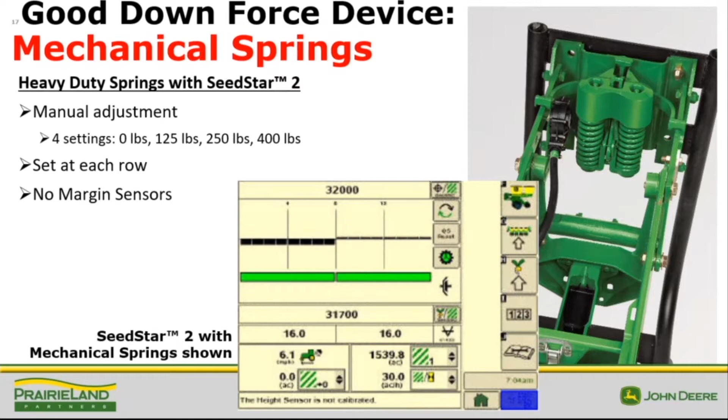How do we get downforce? Well, we have several different devices. We have a good downforce system that we call mechanical springs, shown here. These are heavy-duty springs. I can set them to 0, 125, 250, and 400 pounds for each row. And these are very reliable systems, and they are set once per field usually, and off we go planting. So that's a good downforce system.

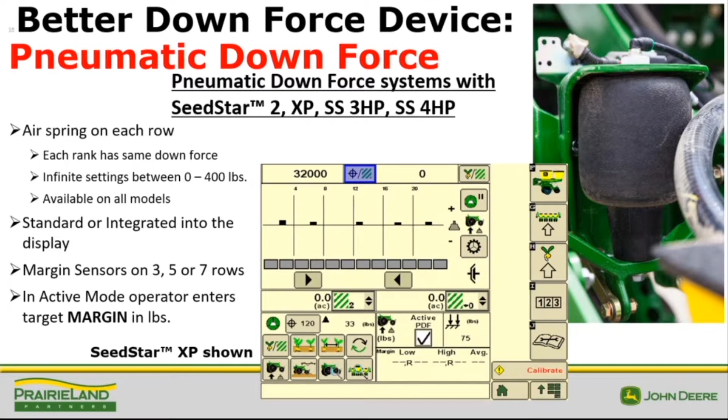Now, the best downforce system is called the individual row hydraulic downforce system. It is best because hydraulic is really good. It's faster. You get another 50 pounds of weight transfer. But it's the best because each row has their own amount of downforce.

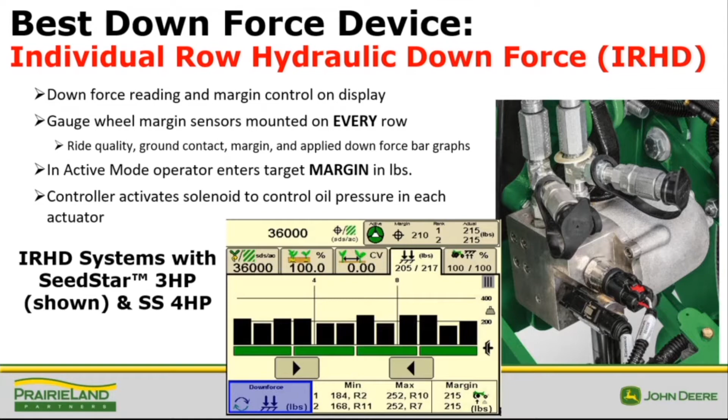So what you can see on the screen in the center is that we have a target margin of 210, but each row has a unique amount of downforce to attain that 210 margin, and that's for each row. So if I had the margin screen up here, they would all say 215, but you can see on the screen that each row has unique downforce. This, of course, is associated with SeedStar 3 and SeedStar 4 equipped planters.

So now let's talk about these downforce electric systems. And I call them systems because that applies to the SeedStar style in the cab as well as the mechanical system outside the cab. So let's start first with our standard pneumatic system. Now, this compressor in the center of your screen there is associated with SeedStar 2 or ComputerTrak 350 equipped planters. This is a nice system in that the little toggle in the center of the screen there lets you adjust the PSI in the air bladder, air spring there, and you can adjust it to your preference across the whole planter, one place to stop.

Now, the gauge here on the lower left-hand side of your screen measures both in pounds per square inch, and it has a correlated scale to show you the amount of weight transfer. So it'll tell you that airbag has X number of pounds in it, but it is transferring a certain number of pounds from the toolbar to the row unit.

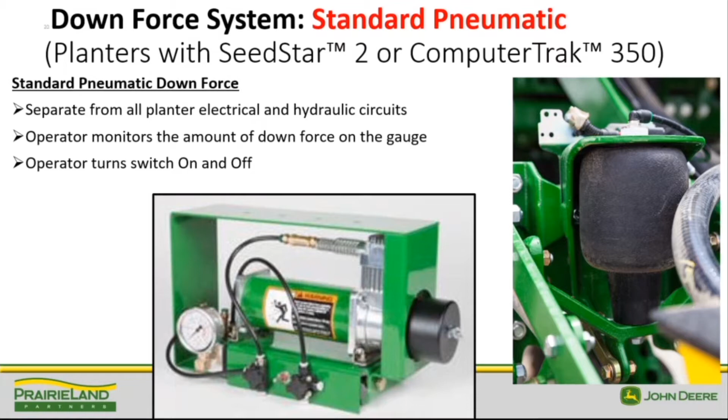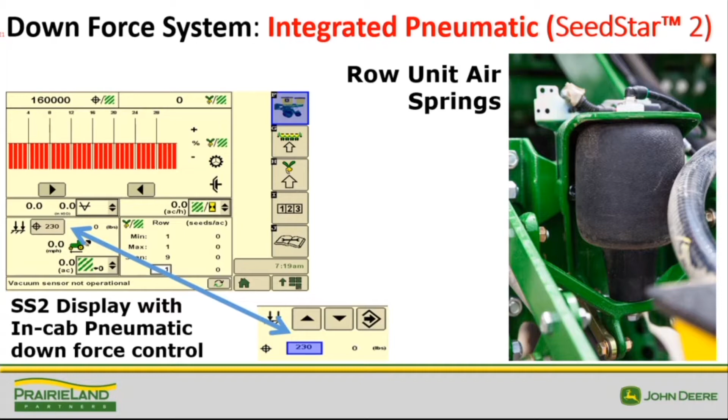Nice gauge, nice indicator. The next level up downforce system is called Integrated Pneumatic Downforce System. It too is associated with SeedStar 2, but it's different in that I can adjust this from the cab with the downforce target there of 230. So that 230 pounds of downforce target then is the amount of weight transfer, not the amount of pounds per square inch in that airbag there.

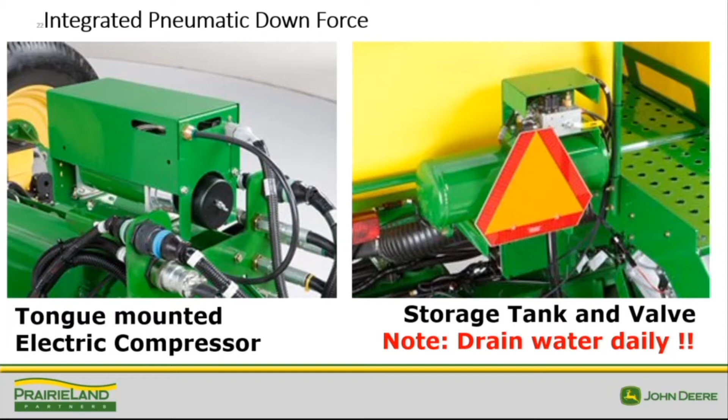Now, on the back of the planter is going to be a 5 or 10 gallon air tank shown on the right hand picture and a valve body with electric solenoids on top. Now, the compressor on the tongue of the planter shown on the left hand screen is larger than the one we showed you in the base system, but all that electric compressor's job is to put air in the tank. The valve puts air in the bag. And so that is what is done by the operator from the buttons in the cab.

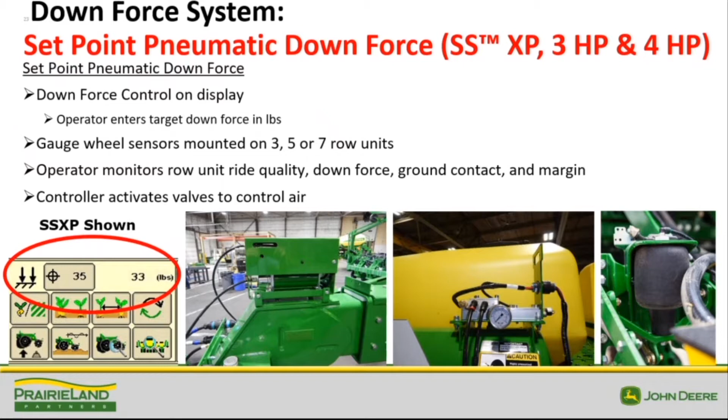So now let's talk about our set point pneumatic downforce system. This is associated with SeedStar XP, SeedStar 3, SeedStar 4. The difference between the integrated and the set point is that we have margin sensors. And those margin sensors are called gauge wheel load sensors on 3 or 5 or 7 row units on the individual planter. So now what happens is I'm able to get a feedback of how much margin I have if I have a set point system.

Now, the top of the line is the active pneumatic downforce system. What we're able to do is set our target margin, and what that does is the computer, not shown, will set our downforce to achieve that margin.

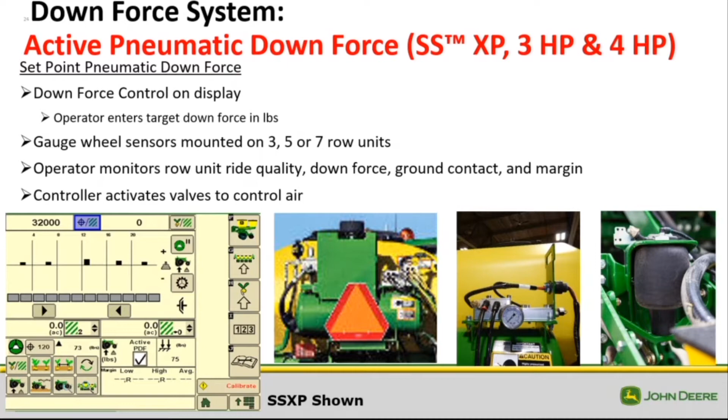So what we have to have is an air compressor on the back of the planter that is two times bigger than the one we had on the previous unit. And what that does is it gives us more volume in that twice as big tank also, so that when the computer is adjusting the downforce much more frequently than us humans do, we have the air capacity to do that. So this is a nice system, and you set it and you keep driving.

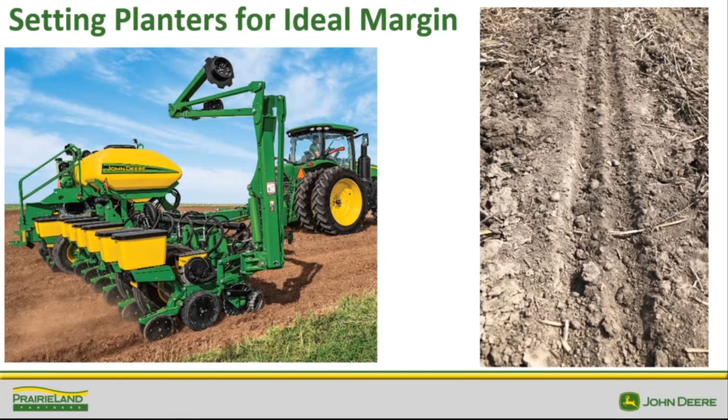Speaking of setting things, let's talk about how to set planters for ideal margin. So what we're going to be doing is trying to attain that ideal closed seed trench you see there on the right that we took early in the 2020 planting season. What we now need to understand is that if we're going to use set point, the operator is in charge of adjusting our target downforce.

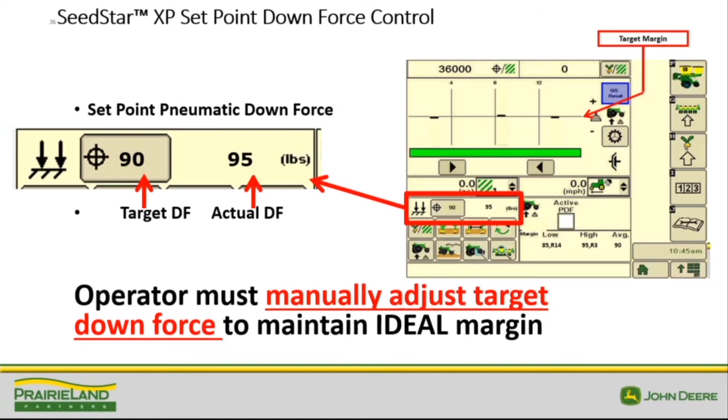So you can see the target sign there, and we're going to have a target of 90, and the actual downforce is going to be, now this is weight transfer, not PSI again. The operator needs to adjust that margin or the downforce target to make sure our margin target is being maintained. And that's what we're going to try to teach you now, is how to set your planter if you're using set point. Now, the operator's manual tells us to put a number in the downforce target of 75 pounds.

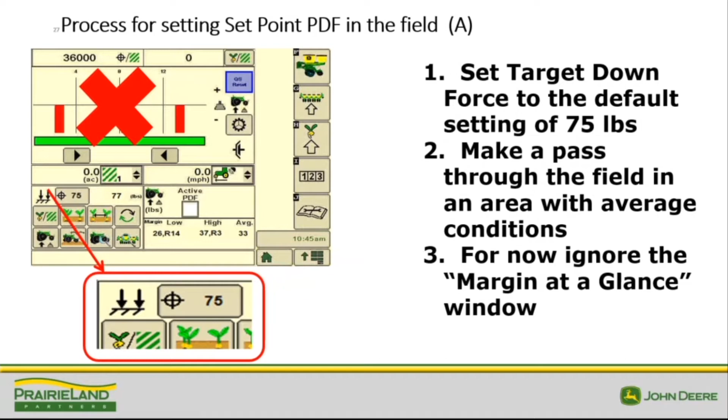All right, you've got to start someplace, and that's a good place to begin. So with 75 pounds in my target downforce, we're going to make a pass through the field in normal conditions. Now, for now, we're just going to ignore the margin at a glance window because we haven't set that yet. So where do we look for that ideal seed trench?

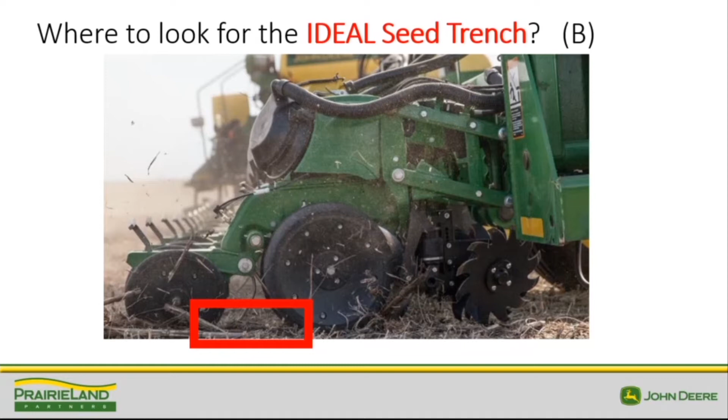Well, I put a red rectangle around where the ideal seed trench lives, and you need to be inspecting. It lives ahead of the closing wheels and behind the double disc openers, and so that is where you need to be looking for that ideal seed trench. So the pictures I've been showing you are with the gauge wheels raised, so we could get a better picture of that. But that's where you need to be looking for that ideal seed trench.

Now, as you make a pass through the field, get out and inspect that seed trench. You may have to add to the number. You notice we went from 75 up to an average of 90 pounds margin. What we need to do is just adjust our downforce until we get that ideal seed trench. Now we need to set our ideal margin.

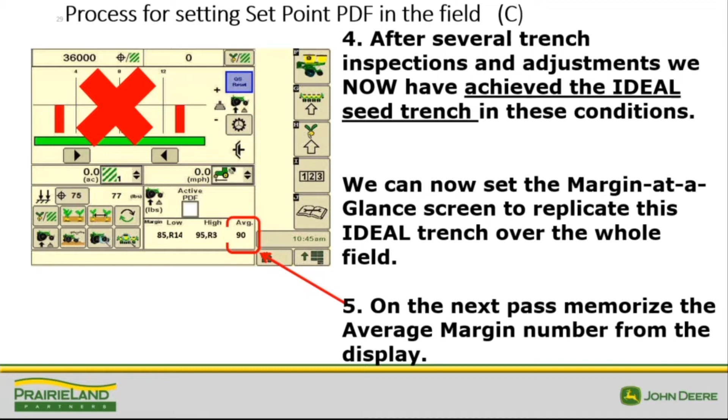And so how we do that is when we have that ideal seed trench attained with our perfect downforce, the next pass through, we look at the average margin number here shown in the red square on the right. So in this particular case, it was 90 pounds of average margin. Now, we need to enter that into our target margin screen. Well, how do we get there?

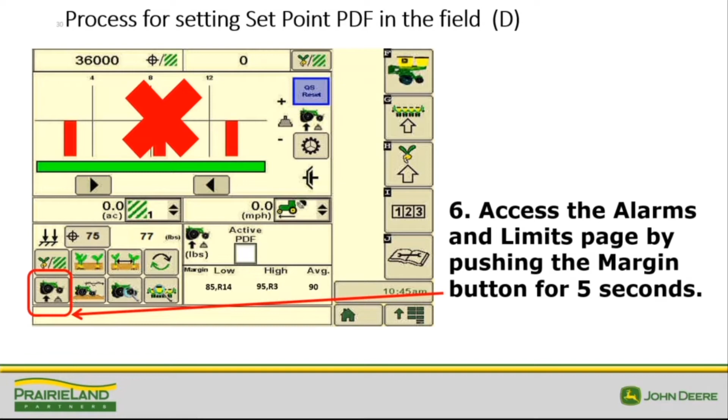Well, for 5 seconds, we hold the margin icon in the lower left-hand corner of the screen. And when we do that, after about 5 seconds, the alarms and limits setup page appears. So now in the empty target margin window there, we need to enter that average margin into our target margin screen.

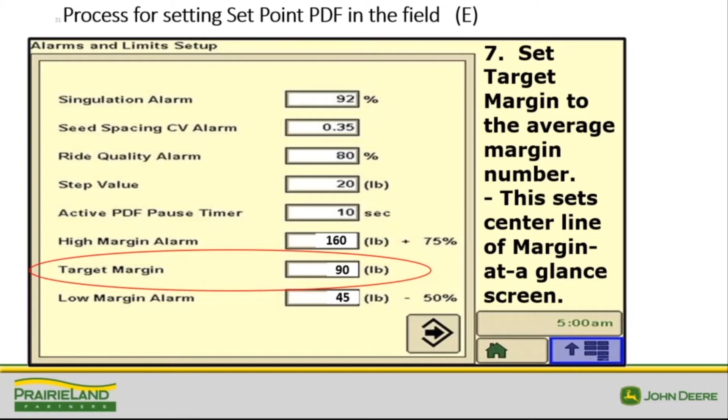Now, if you leave the factory default settings of 75% high warning and 50% low warning, those two fields are automatically populated. But let's say you want 85% high margin, you would just type the number in there that you want. So let's just go with our factory defaults of 90 in the middle, 45 and 160.

So now that we've set our downforce to attain our ideal seed trench, we can now trust our target margin window. So as we go through the field, if the screen looks like it does here, we're all good. We do not need to change our downforce. But look at the red indicator over here. If the bars go above the line, it indicates the gauge wheel load is above target margin, so we need to lessen or decrease downforce.

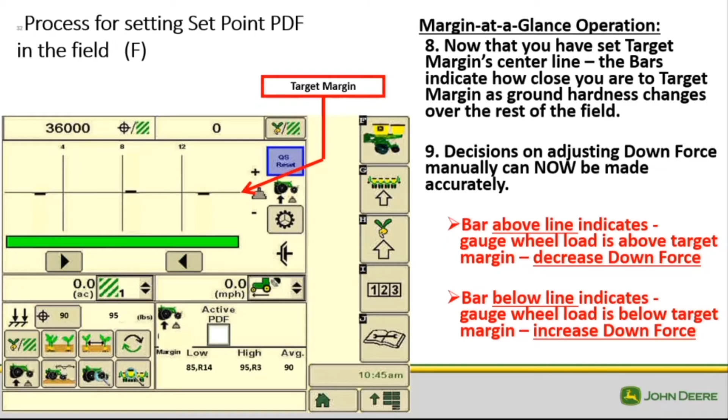Whereas if the bars fall below the center line, the gauge wheel load is below the target, and we need to increase our downforce. And so we manually change the 90 number there to either a bigger or smaller number as conditions of the field change. And then without stopping, we can be assured we have that ideal seed trench back there on the planter, and we don't have to stop and look for it.

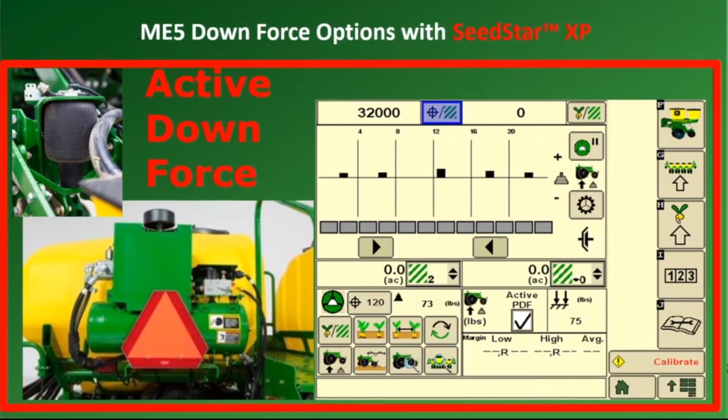Now, if you would like a system that does that for you, that's what active pneumatic downforce system does. What I explained earlier is the active system has a bigger compressor and a bigger storage tank, and what that does is it allows us to let the computer run the downforce and we'll just set margin.

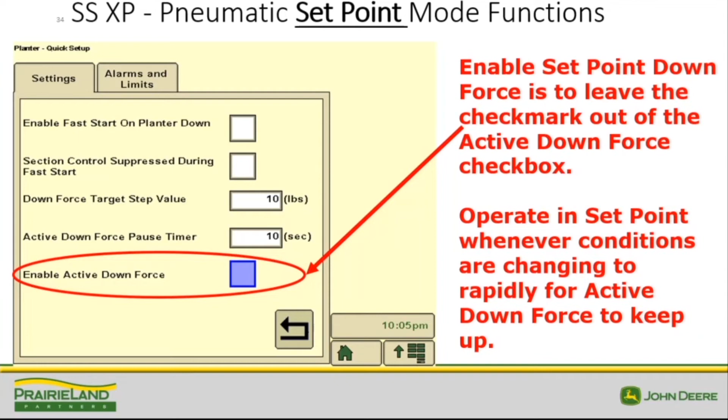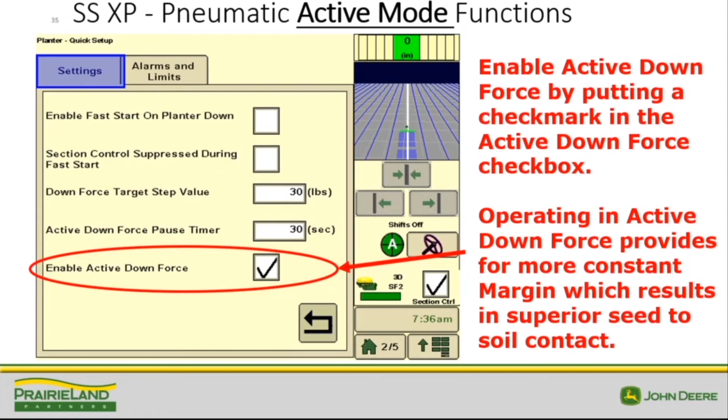Now, we don't have to do that. There can be conditions where set point is still a preferred option, even with that big compressor. And so you would just not enable active downforce by leaving this box blank, and that would disable active. But most of the time, vast majority of the time, active pneumatic downforce is going to be just fine and the preferred option.

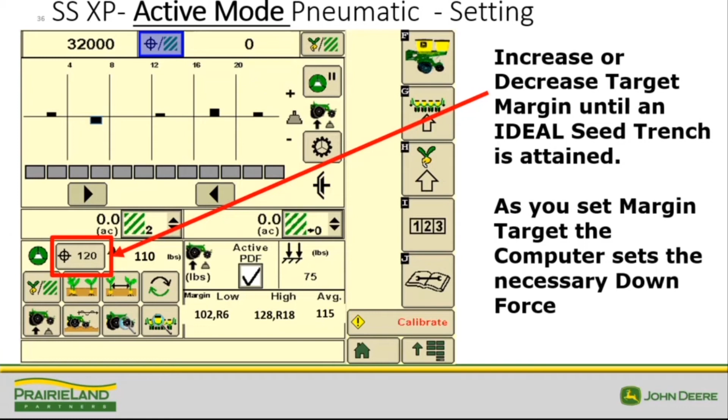Now, setting this is simpler, because now we're adjusting target margin, not target downforce. So very simple, you start with 120 pounds of margin. Then you would get out and check your seed trench and adjust the number up or down until your seed trench is right. Now, the beauty of active pneumatic downforce is you do not have to go to a second screen and change your target margin center line, because you've been doing that as you change your target margin number there. So it's a very simple system to set.

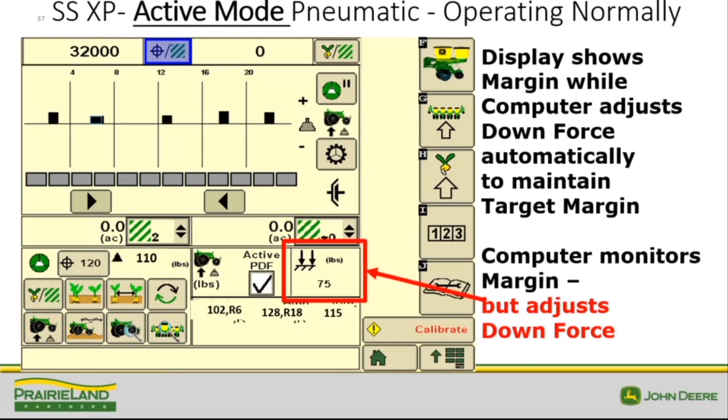Now, what's going on here? Well, if you, the human, are setting your target margin, who's keeping an eye on the downforce? That's what the computer's doing. The computer shows a number of downforce pounds that it is putting on an average row to get the ideal margin that you've set.

The next thing we need to talk about is our planters, or high-speed planters nowadays. I'm moving 7 feet, 12 feet, or 15 feet a second, depending on your planting speed. And all systems have a time that it takes for them to adjust. So the pause timer can be a very good friend if conditions are changing rapidly, and that happens a lot with the speed of our planters nowadays.

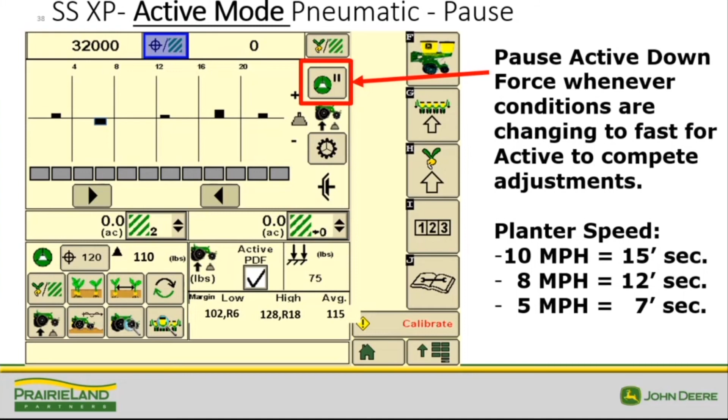So what we need to understand is that if your changing conditions are a football field or shorter, that means that active pneumatic downforce isn't going to have a chance to hit that target perfectly. So a better plan is to pause the active pneumatic downforce system as you're going through these changing conditions. So keep that in mind. That will make your planting more accurate.

What we're going to do now is show you a simulated planting scenario. You can see here that we are utilizing wooden blocks. We're going to have a 2x4 that is pushing up on the double disc openers. We also have wooden blocks underneath the closing wheels. But what we're going to do in a controlled environment is adjust the up force on our double disc openers so that we can show you how the monitor reacts to that.

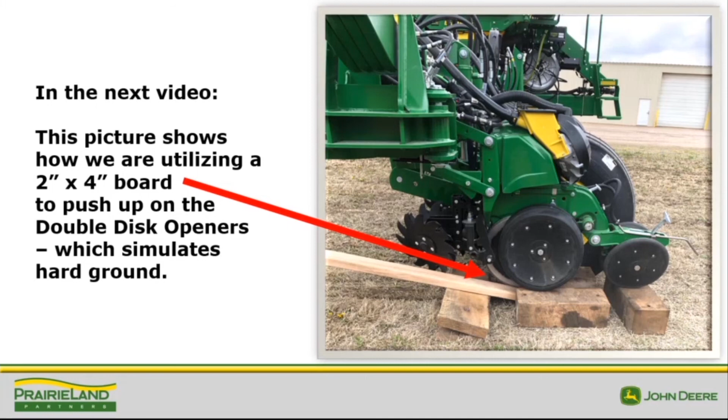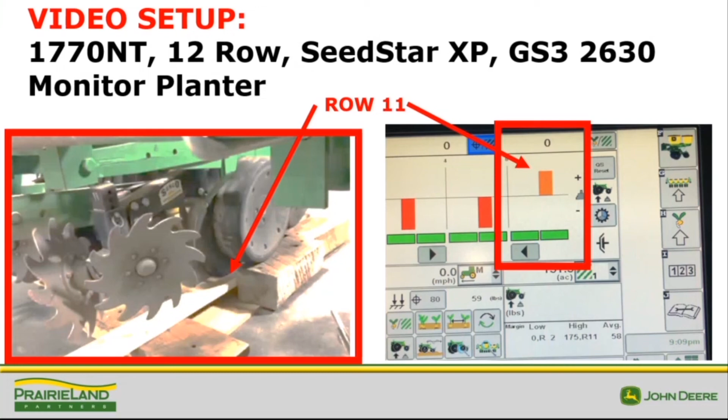So when we watch the video in the next section, what I want you to be monitoring is row 11, because row 11 is the one we have our 2x4 pivoting system under. So let's watch this video and see how up force affects our display. We are going to simulate downforce and margin in a laboratory setting. Please remember that the purpose of this video is only to monitor row 11 on the screen, because that's the only one we have the 2x4 setup in.

So as we start the video here, what I want you to comprehend is right now I actually have excessive downforce, and that is indicated by row 11's orange bar. Now, if that's what they all look like, I need to change that. So what I'm doing now is I'm standing on the 2x4 and I'm creating up force as though it was a hard soil. So what you've seen is I've gone from excessive margin to way low on margin. So what the operator should be doing is changing that target downforce to where it gets back in the black as shown right here.